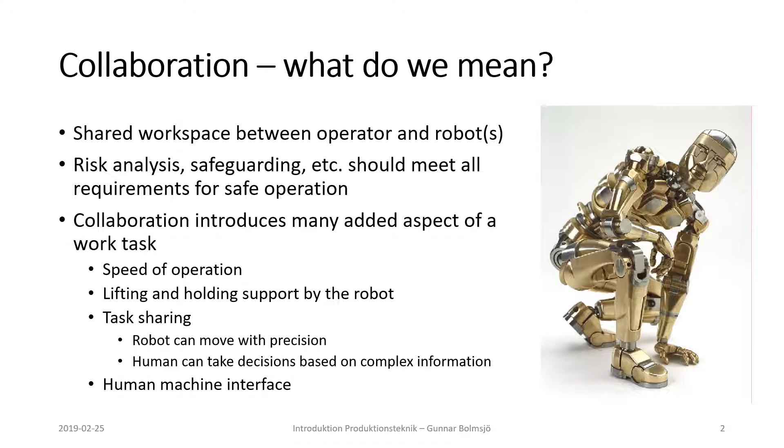So the next few years then, what are we going to see? We are in what we call an Industry 4.0 next industrial revolution. Maybe revolution is not the right term here, but something is happening. It's a paradigm shift anyway,

that we're moving into a situation which allows for more artificial intelligence, more autonomous operation, autonomous work tasks done completely by algorithms, controlled by algorithms in another way than was possible before.

What we have seen so far is that machines, robots, whatever it is, processes, they have been controlled by pretty deterministic programs, so that in every state, in most cases, it has been possible to know pretty well how a process is going to happen.

What is the robot going to do, what is the machine going to do, and so forth, with a few exceptions when we have sensor-based control. But anyway, that has been the norm. But that is going to change now. And we are moving also into this kind of thing, which is collaborative applications.

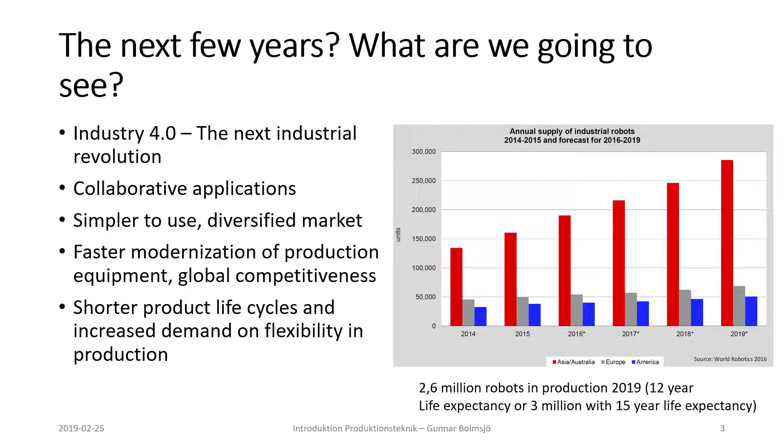The operator and robot collaboration in production systems. So we talk about this co-work, and when we do that, we have to look at safety, of course. That is crucial, and the machine-human interface, and that has to be an effective and intuitive sharing of work tasks.

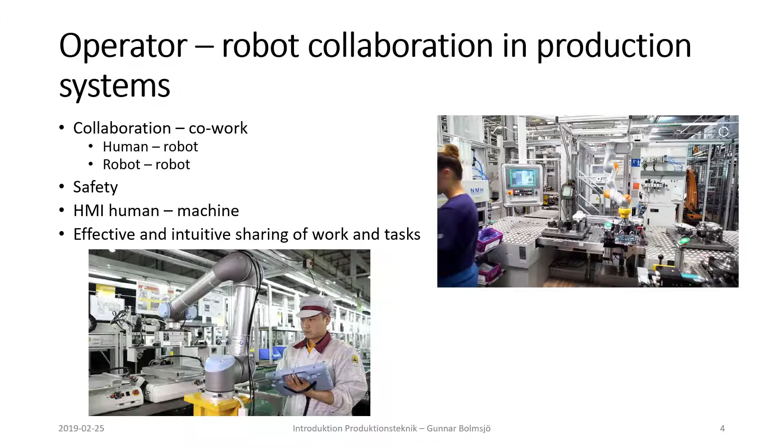And this case here is just a use case to illustrate what we talk about. So the human is actually combining the precision and holding capacity of the robot by getting and placing small components where they should be, which otherwise would be quite complex and complicated for a robot. And the mobility of the human is just outperforming any type of robot in this type of application. So this is quite a good example of how it could be with this kind of combined collaboration.

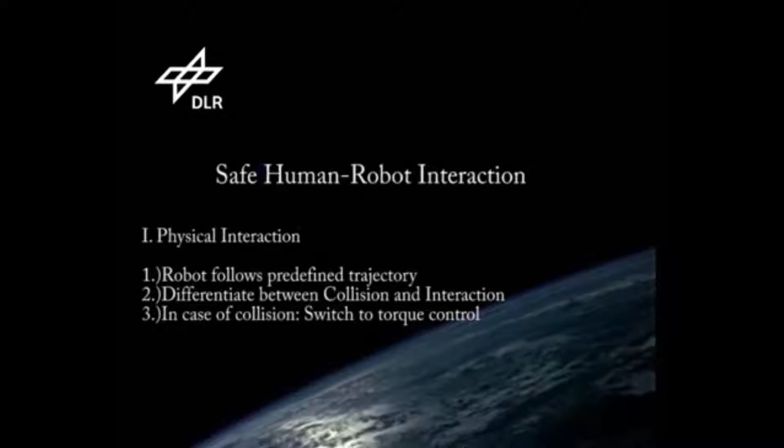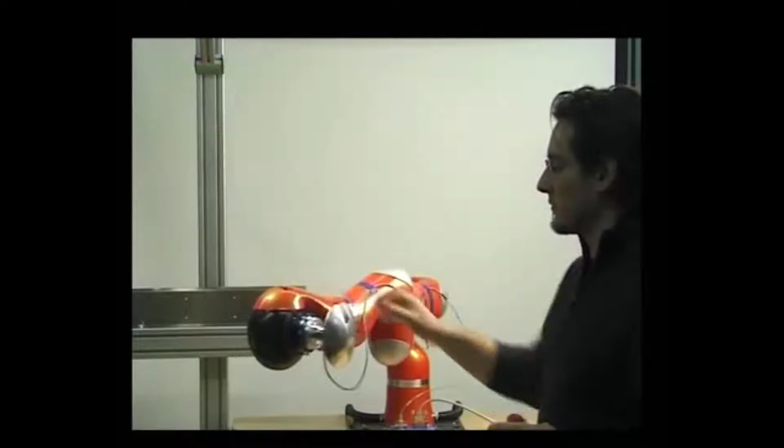But we come back to the issue of safety and some examples about how that could look from the perspective of what is possible when we talk about force torque control, safe control, and there are opportunities in autonomous mode control, so to say. So these movies are made by DLR in Germany, in Munich. They have a really good mechatronics group related to these kind of issues, and force torque control of a KUKA LWR robot arm.

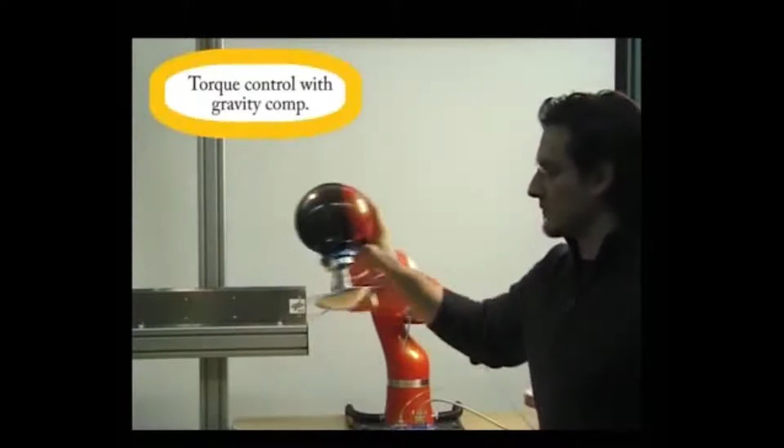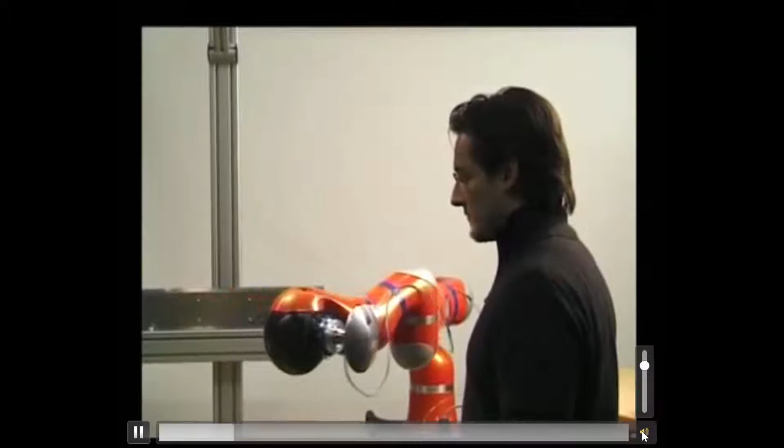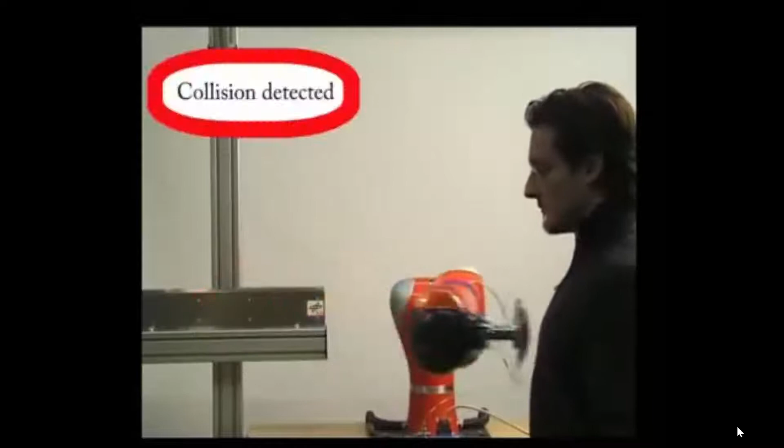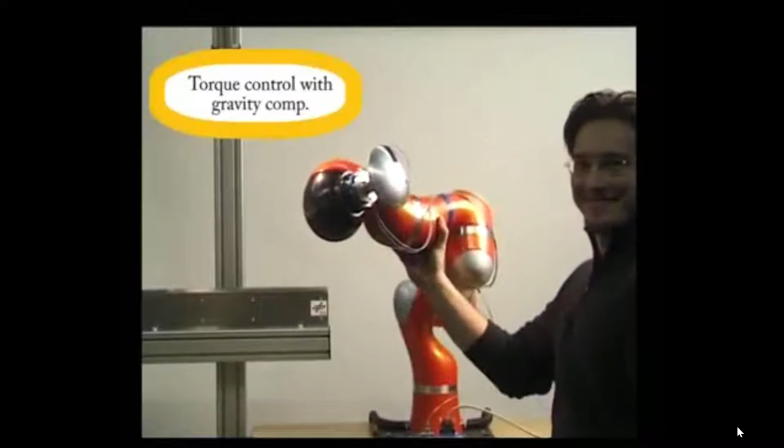And this relates to some experiments related to human impact experiments, as you see here. And the controller detects the collision, and it has to have a gravity compensation because the measurement of the force is related to the impact of the body. But at the same time, it has this kind of gravity that it has to compensate for, so it knows what is the impact, what is the gravity, and so forth.

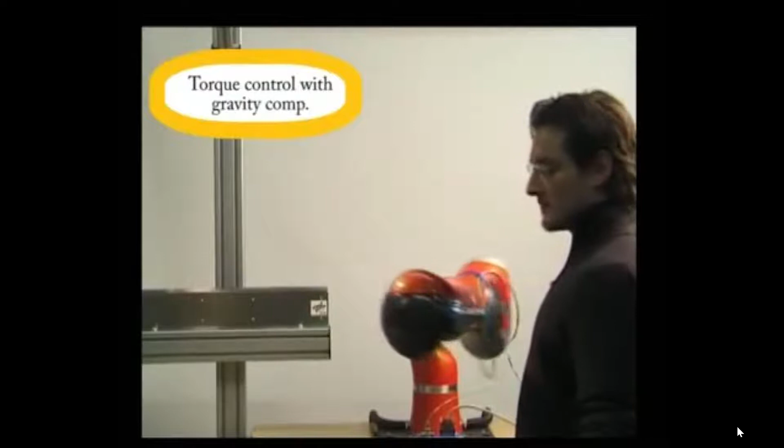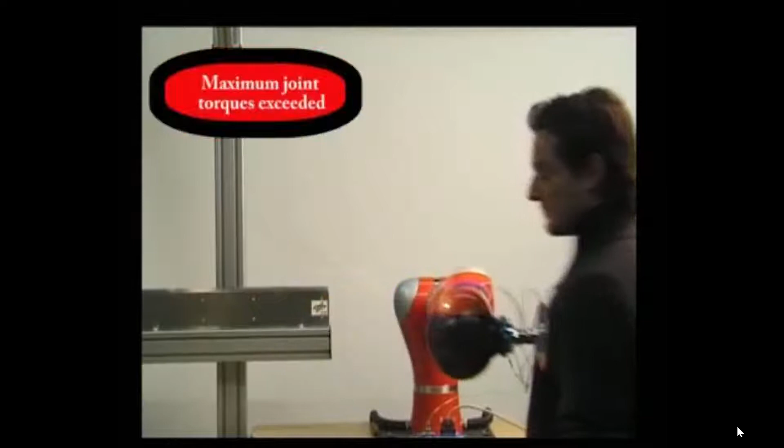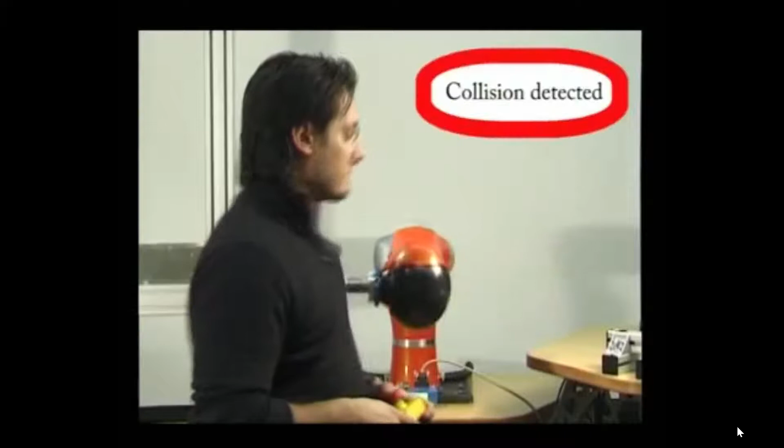And there are some limitations. How fast can you go without hitting too hard, so to say? That was in this case the maximum joint torque exceeding. And what is allowable or acceptable, this kind of experiment in reality should be much lower than this, of course. And especially if you have something sharp in the tool, of course, that is super risky in this case. So that is nothing we can have.

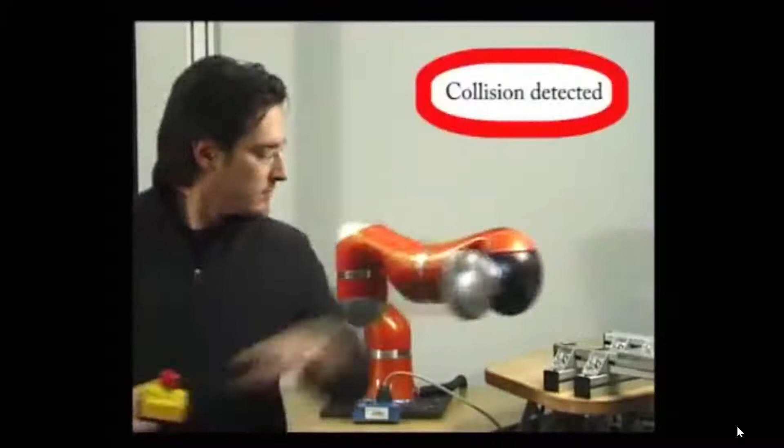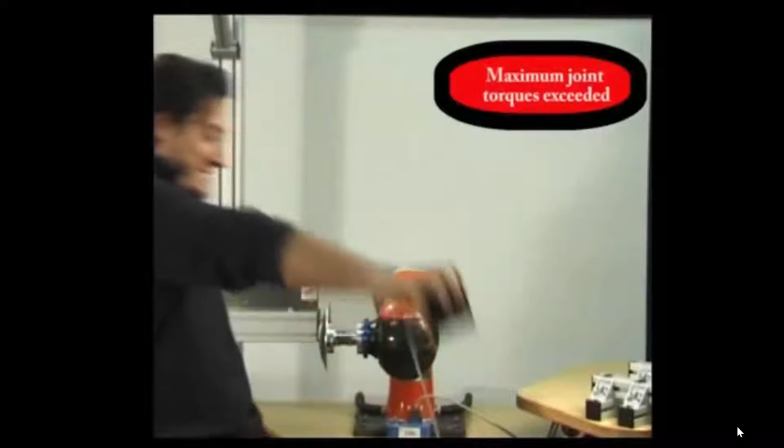This is another experiment on the shoulder. And this is the highest velocity that this robot can actually go with, 2.5 meters per second, which is pretty high. And that is nothing that could ever be accepted. But for demonstration purpose and for research purpose, it illustrates how things can look.

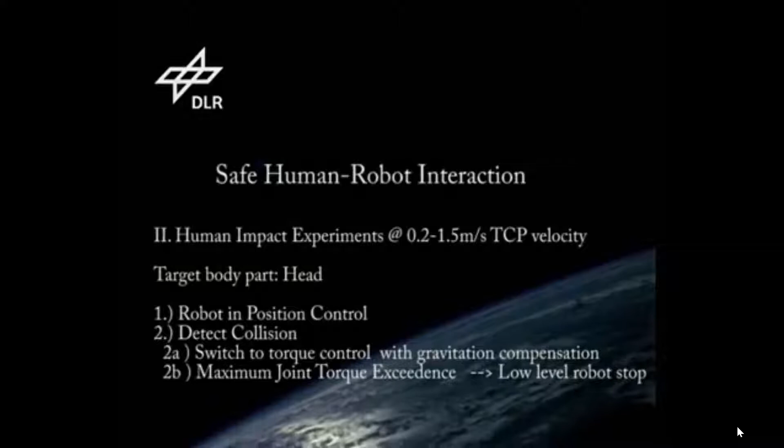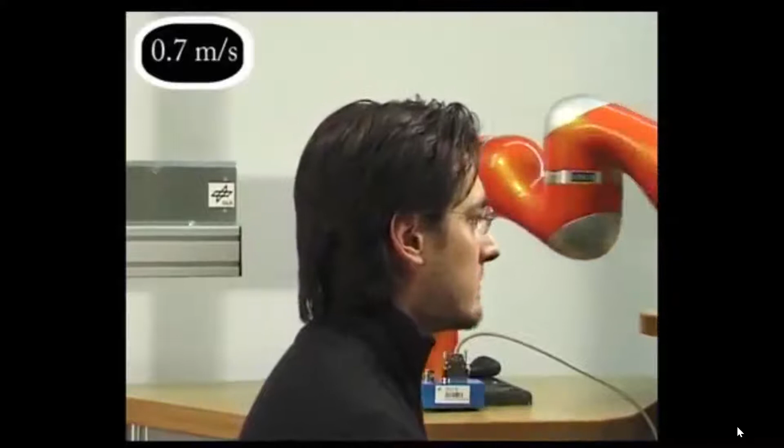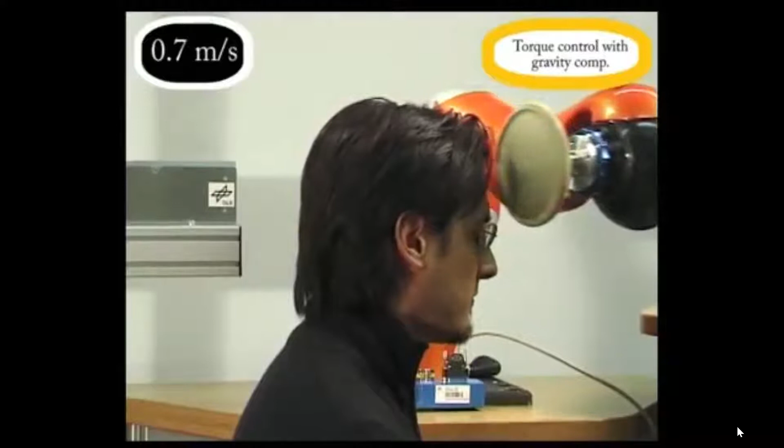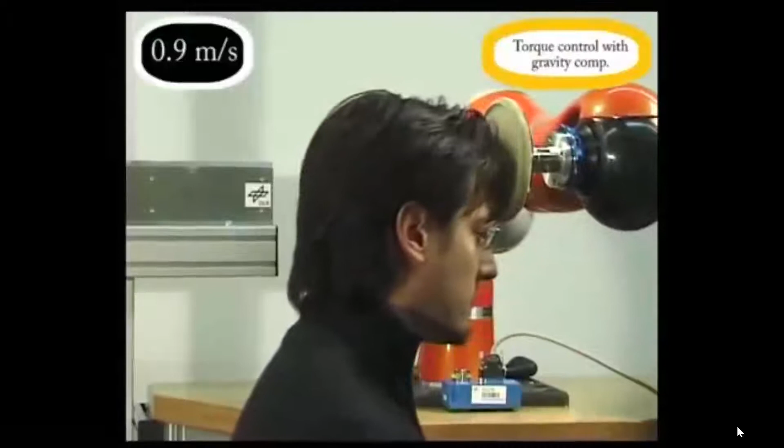But if you do the same type of thing with an industrial robot not intended for this kind of collaborative application, that would be like a killer, especially this kind of demonstration with collision to the head. Most robots really don't stop. This robot has a control system that has that kind of capability to detect and react fast. And that is nothing that anyone should do at home, really, or in the lab. For what reason? Because this is really dangerous or even fatal in most cases.

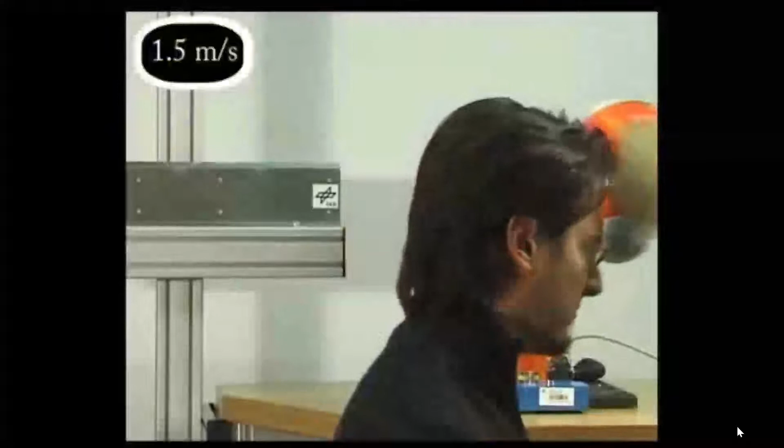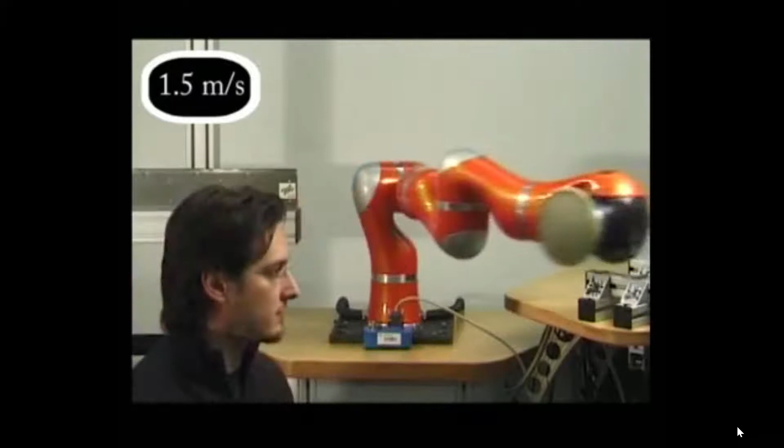Because moving with this kind of speed, in this case 1.5 meters per second, is really fast and really dangerous. You can also see that he has his glasses on. And I asked him, and he said that he really forgot. It could really have destroyed his eyes. So this is nothing one should do. But this shows anyway some quite interesting research in the area of collaboration, and that can be taken further.

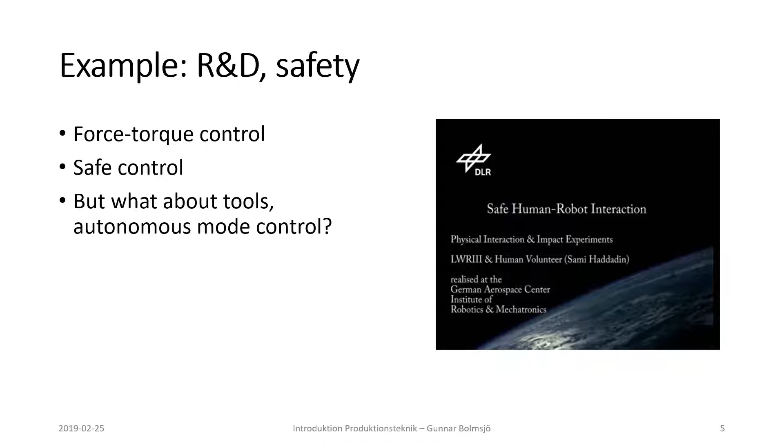This guy, Haddadin, is currently working with the Franka robot that I will show later on. Some other examples related to research and development and related to skills are work related to virtual reality, augmented reality, sensors, deep learning, and artificial intelligence.

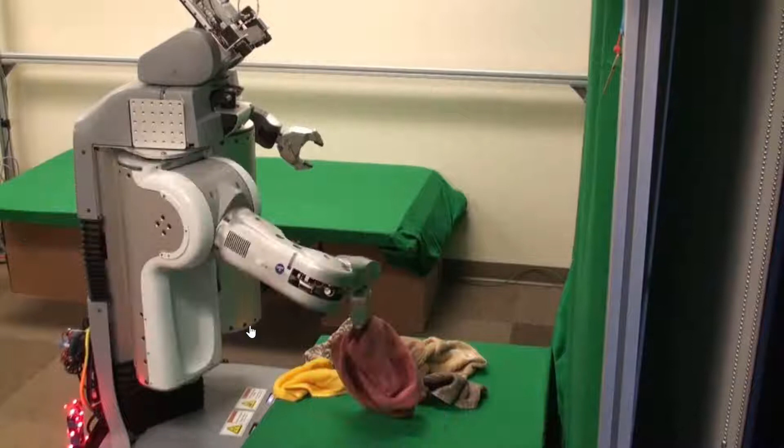And if we look at it in more detail, one can look at some applications or some work that we feel is really simple. And some people ask, is it possible to do it by robots? Like this, with cloth grasp point detection. So yes, it is possible. And in this case, it's the robot PR2, costing something around 250,000 euros.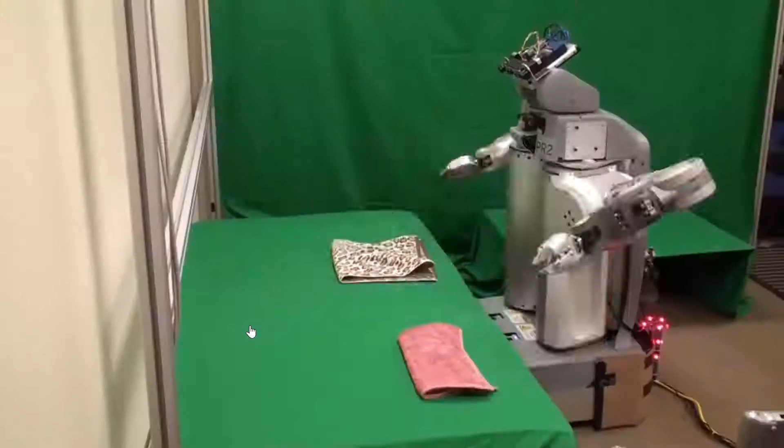It can do this. Now one has to accept that the speed of operation in the movie clip is much faster than the real application performed by the robot. But it does it, really. It uses stereo vision and scanning capabilities and so forth to identify what it is grasping, and then it can perform the task. So things can be done which normally are done by humans, but on the other hand, usually these kinds of tasks can be performed by humans much better and faster, of course. It can continue like this.

And the other one is pretty interesting because that is how to make coffee using a coffee machine. And actually, what is done here is that the operations by the robot are done and programmed, so to say, on the fly, using the information on how the machine actually works and models, even also 3D models, of how it is or should be operated by the robot. And well, let's have a look at it.

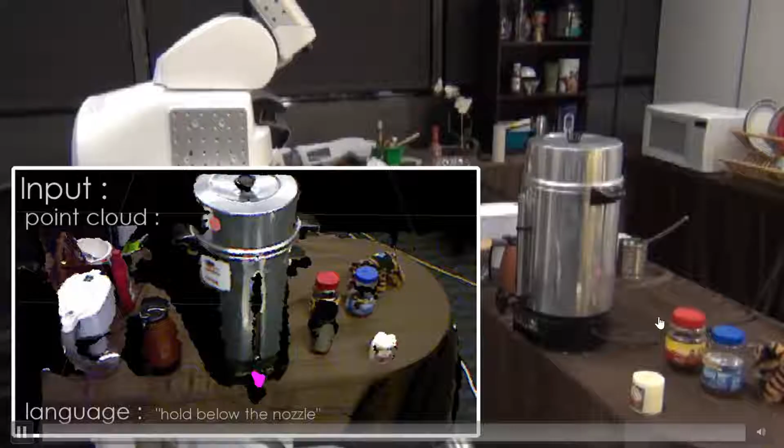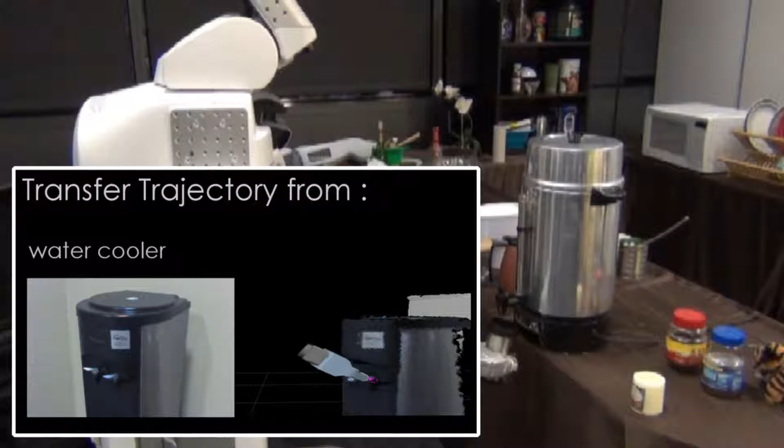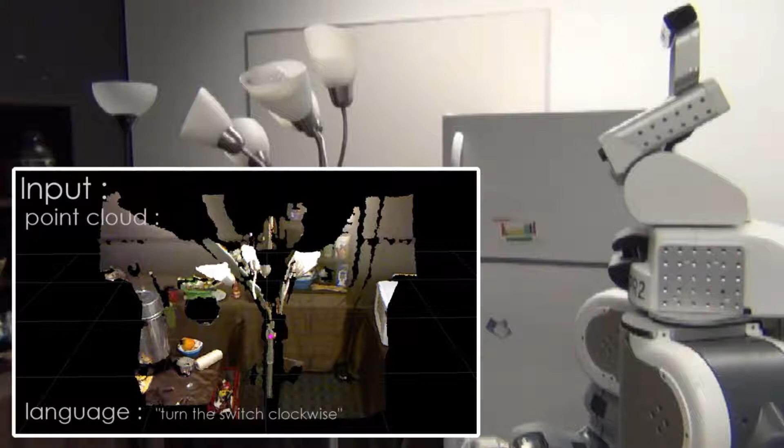And it has sensors, so it can combine, so to say, the model-based information with the real information. So it's a sort of augmented reality, reactive programming, and the verification is done on the fly when it is working. So there are different types of applications here.

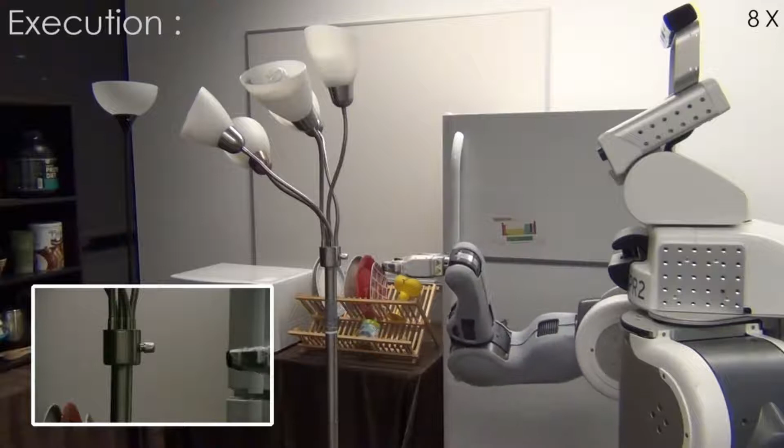Now it is instructed how to turn on the knob for the lighting. It gets the verification when it does so, but it has a model of what to do, so to say, and this way the robot can learn different things on the way, which it has in a model, and that is actually what Industry 4.0 is about. But this introduced virtual reality, augmented reality, and in real life feedback to the model and vice versa. So it's pretty interesting.

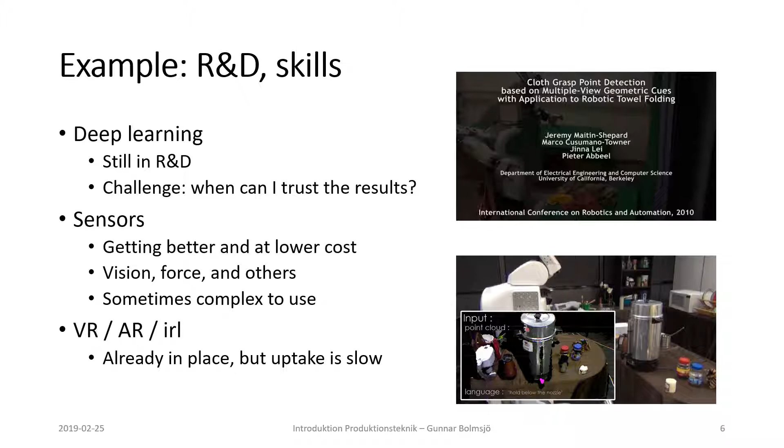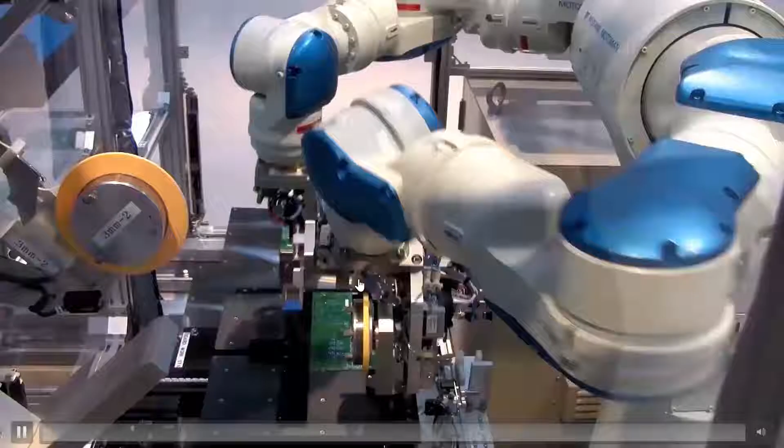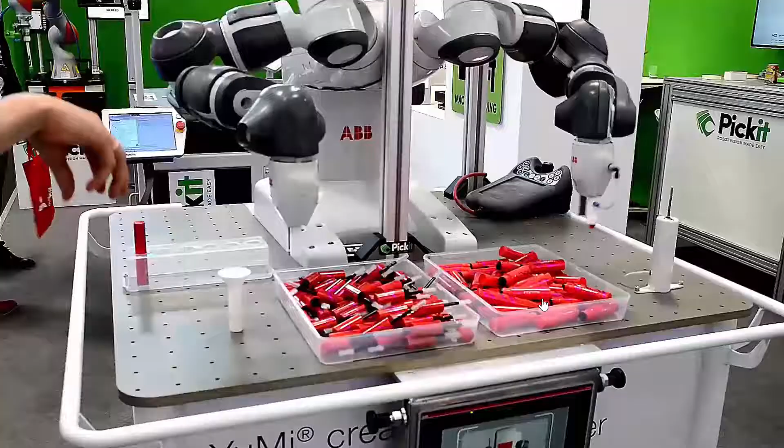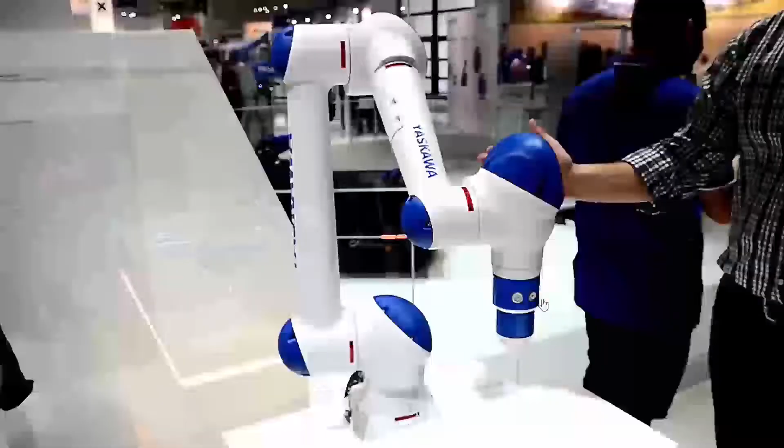So what's next then? This video shows some aspects of what's ongoing at the moment and what to expect. Two-armed robots have been ongoing for some years. It hasn't taken off as expected, and in reality, a two-armed robot in one unit is a bit more expensive than two single-armed robots combined, which also could be formed in one controller. But still, in some cases, it creates some opportunities to use it like this.

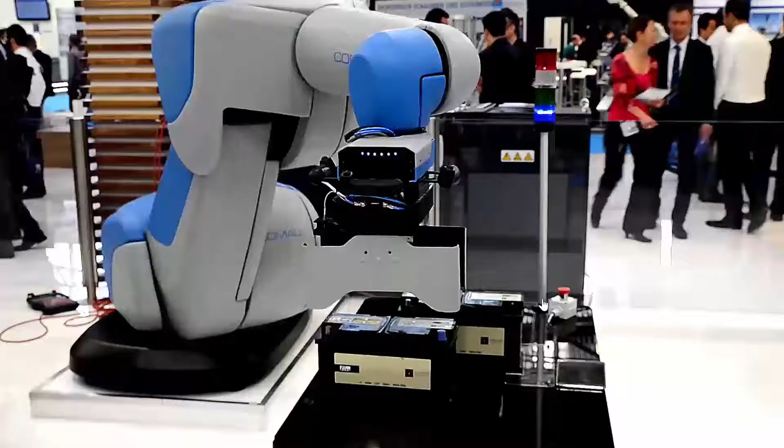And the collaborative applications are supported by new developments of robots that have inbuilt force sensors for detection of proximity of people or collisions. This is another example. The former one was Yaskawa, and the one before was from ABB Robotics. So this is Comau, an Italian robot company. So there are many developments relating to these kinds of things, actually.

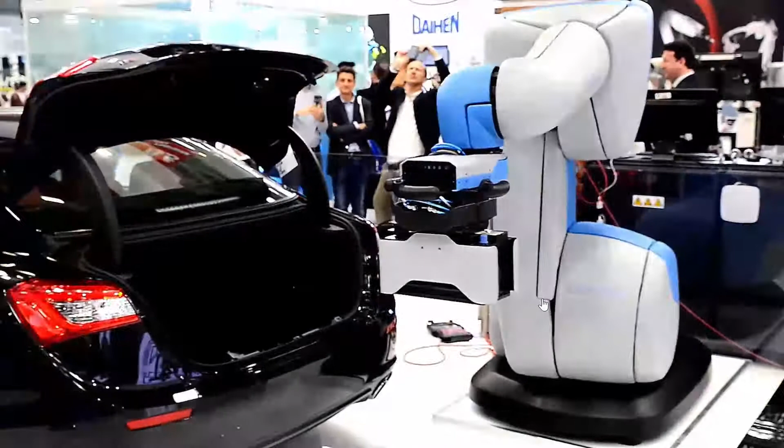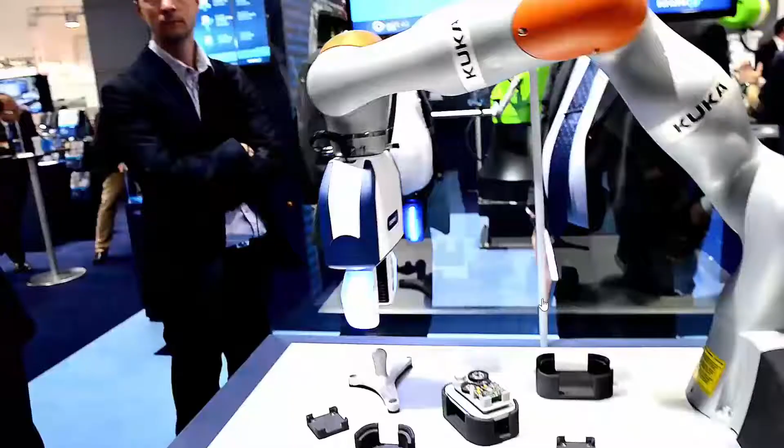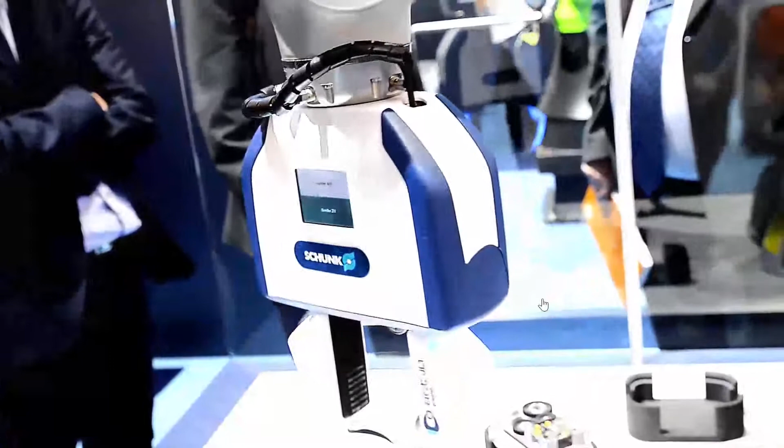In this case, it's the assembly or installation of a battery into a car, and it's supposed to be on the production line, where people are moving around. Now there are some implications related to this, and that is the speed of operation is usually much slower than otherwise. These kinds of robots don't operate at 2 meters per second; they operate much slower. And in this case, the robot gripper was integrated with a sensor to detect the presence of a human.

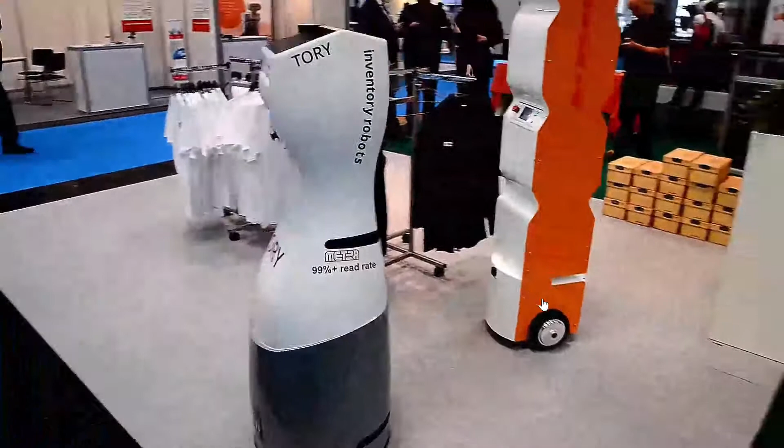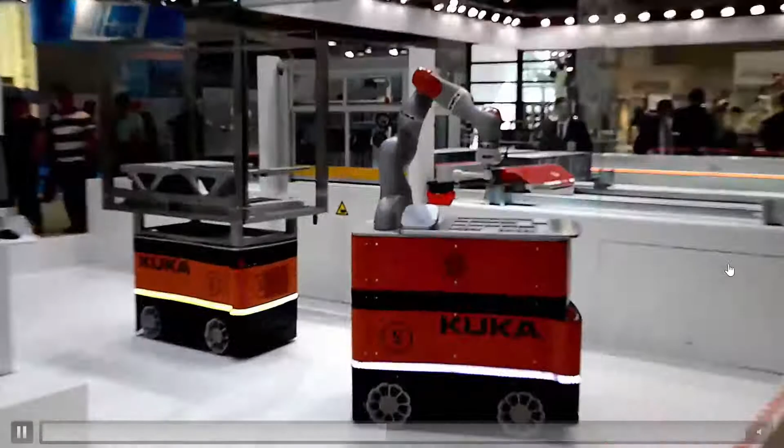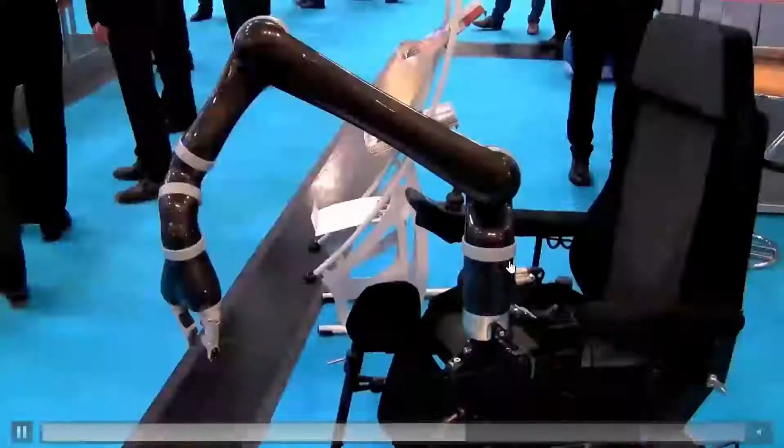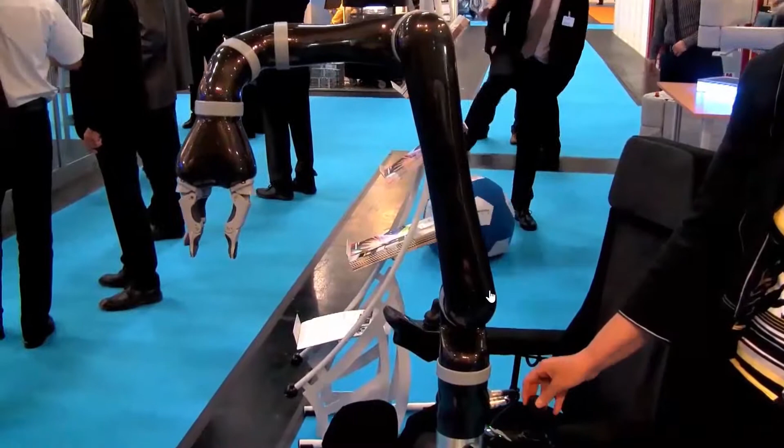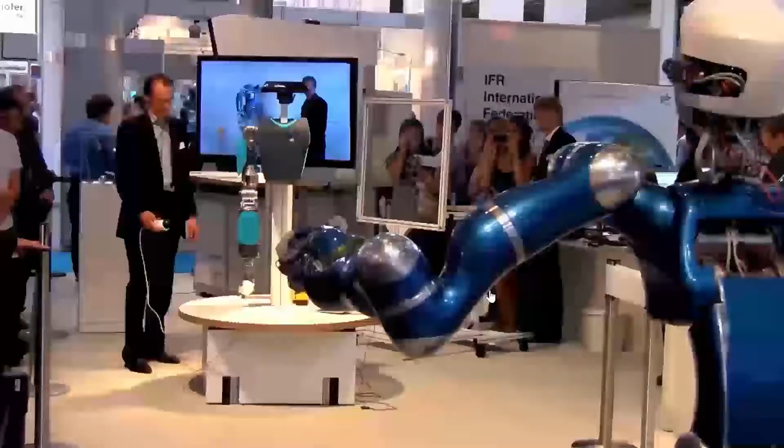This is a lightweight robot to be used on an electrical wheelchair for disabled people, to pick and place things or as an eating aid or whatever. This is a gripper like a hand, but the use of that one from Schunk is only in academics so far.

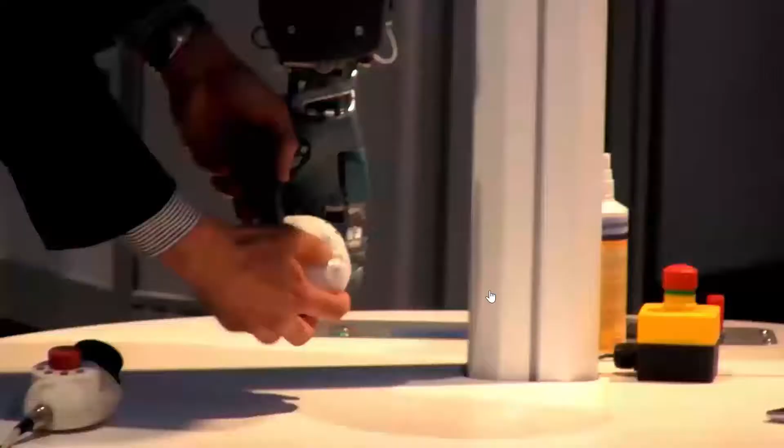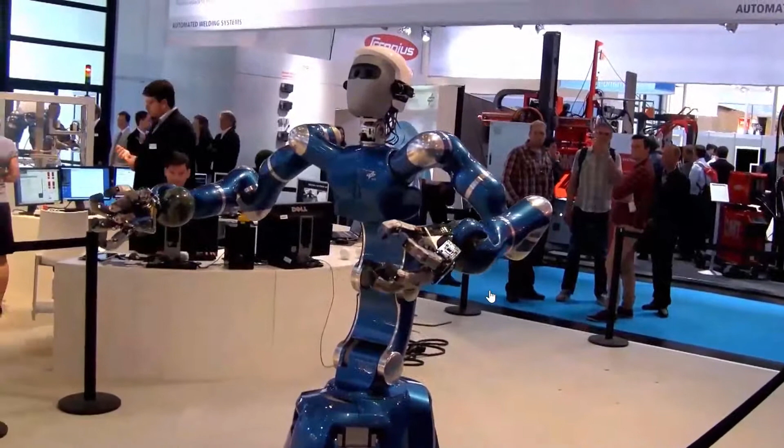This is kind of a demonstration of the capability of reacting to, in this case, a ball coming in, and in reality, it's pretty simple because with that kind of data and the knowledge of what it is about, it just calculates the path from pure physics, so to say, and it works all the time if it's fast enough, and it really is. So this is just a research platform for different kinds of studies related to control.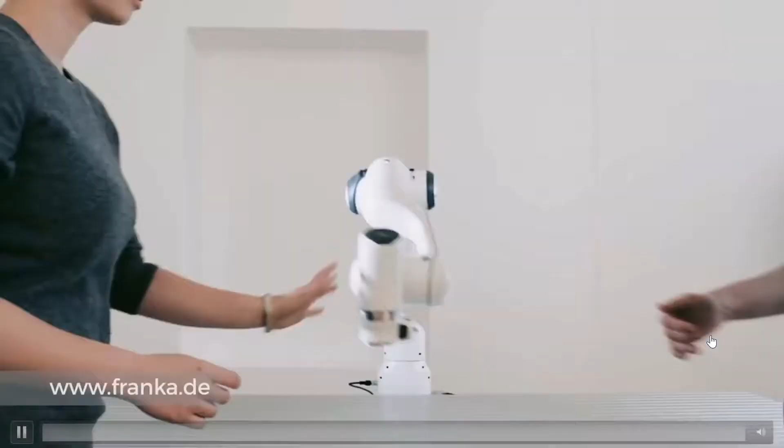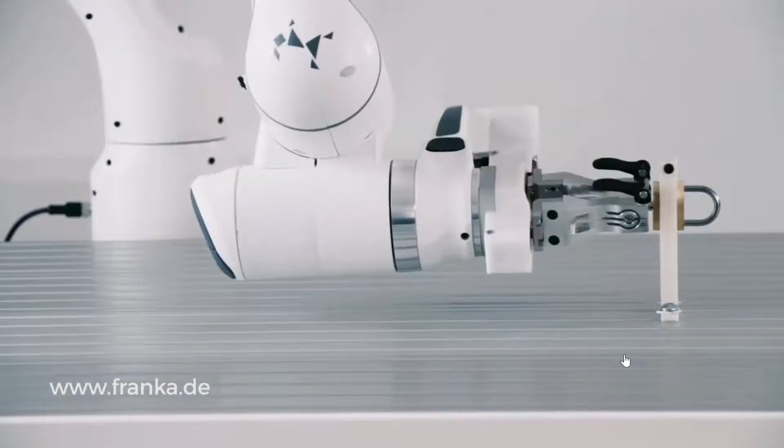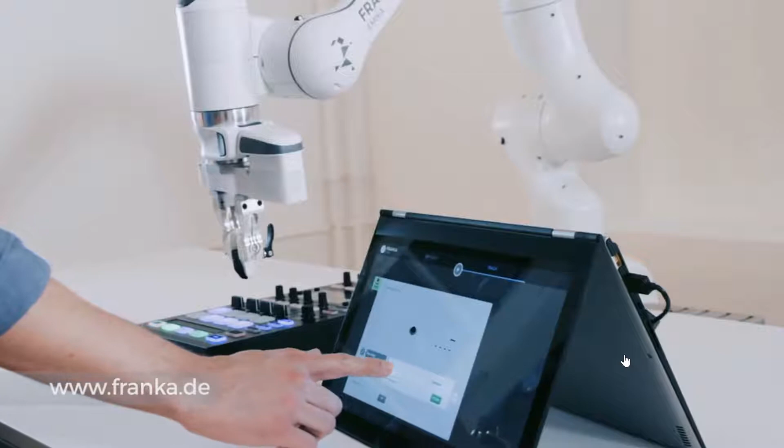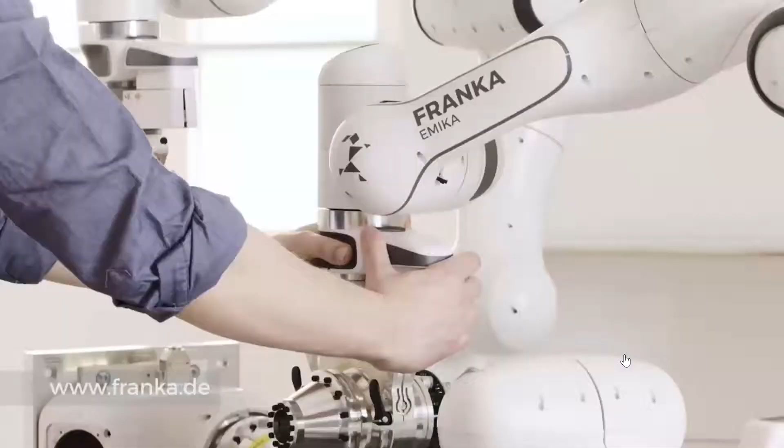I mentioned that Franka robot, and that's an interesting development, actually based on the research done in safety before. I showed the video before. And it has a controller that can react quite rapidly on detecting collisions. It has sensors in all the joints, so it can detect what is happening and react to it. And an intuitive user interface for programming and doing things. And the 7-axis operation, so it's pretty versatile in its motion.

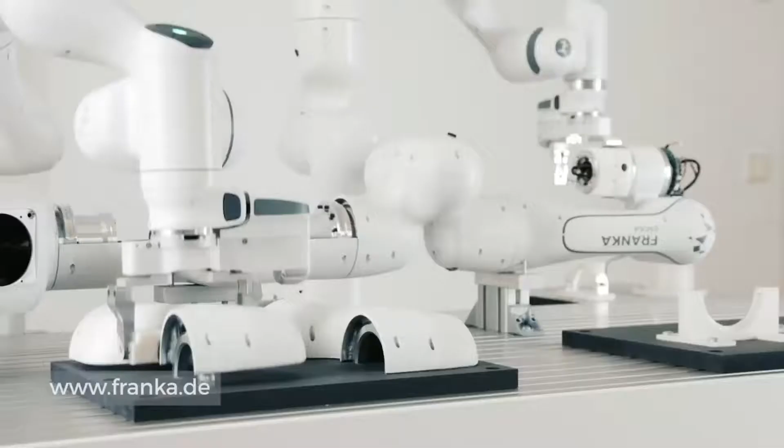Yeah, this is just an example of how the robot is building itself, so to say, more for fun, I think. But anyway, it shows what is possible.

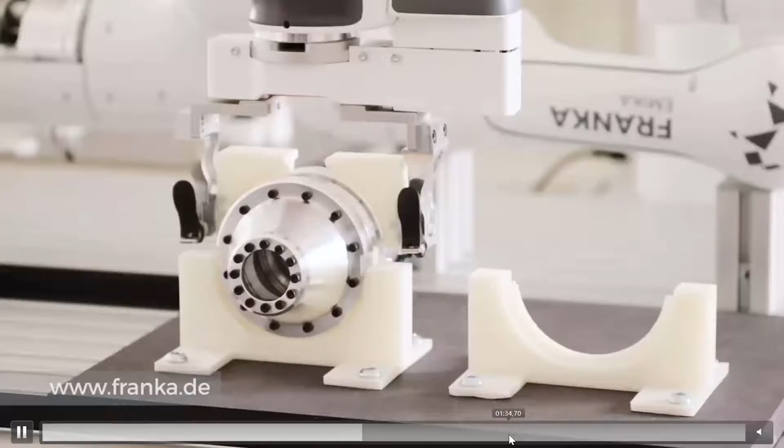Move forward. So, just some discussions based on this. Lots of things are coming up now: sensors, new robot types, software development integration, skills and artificial intelligence, augmented reality and virtual reality, and more. These things are happening at the moment.

Sensors, which is interesting in this, is that there are lots of products out there that require sensors. Take, for example, cars, which are supposed to drive by themselves. So a lot of sensors are in development as we speak, and those sensors could easily be implemented in robotics as well, or machine lines, or wherever it is, and at low cost, because when they are developed and built in millions, they become cheap. And this is a new thing compared to how it has been before.

New robot types, definitely, but most robot types have been developed and made as they are now, but there will be new variants, more specific for specific applications, of course. Some variants that are more adapted for its use. It's a way to actually adapt to the customer needs.

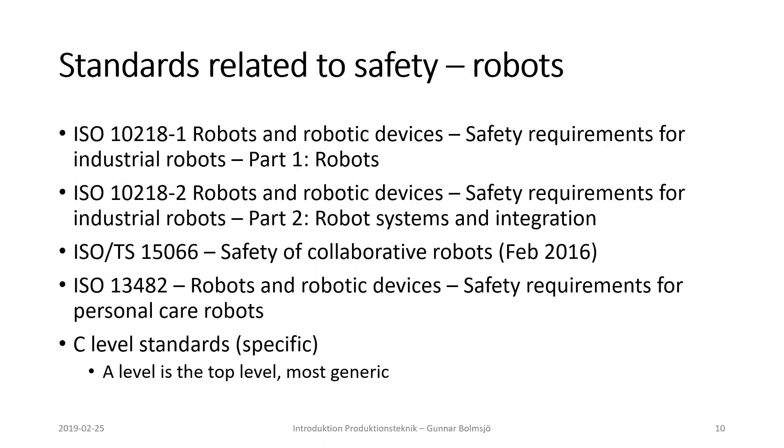And then we have 13482, which is robots and robotic devices, which is related to safety requirements for personal care robots. They are not the same as industrial robots, but they are harmonized together in a way. And what we can see in the future is that it is blurred in a way, because if you use a robot used for services and you apply it in industry, it will become by definition an industrial robot, and vice versa. So in a way, it's going in both ways.

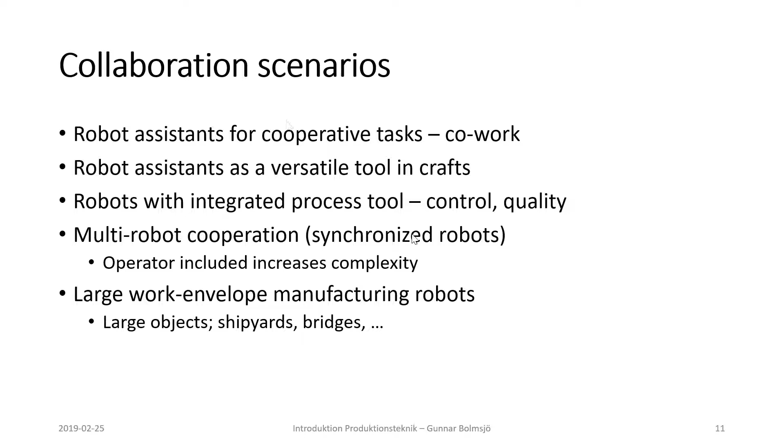Anyway, there are some collaborative scenarios: robot assistants for cooperative tasks, co-work. It could be robot assistants as a versatile tool in crafts. It could be robots with integrated process tools. It could be multi-robot cooperation as synchronized. It could be large work envelope manufacturing robots, large objects, shipyards, bridges, and so on. So the variation here is huge, really, how it could look like.

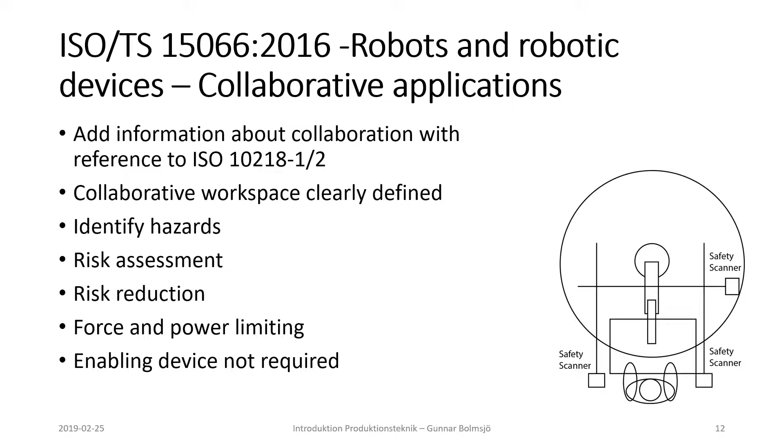There are some challenges still, and that is if we use the thinking behind collaborative applications in the way it is intended, in flexible production, where we change things frequently, and we might even reconfigure the system. It might be the case that there has to be a new risk assessment, a new risk analysis, a new risk reduction related to this. And if this is the case, the CE marking might not be valid anymore.

And in those cases, as pointed out in the standard, it says that in consultation with the user, the integrator, meaning the company, the system integrator that actually made the system from the beginning and also made the CE marking, shall identify and document the task associated with the robot cell, and then possibly assign a new CE marking. So this, of course, is a challenge and not really feasible in flexible production.

Because if we talk about low volume production, we might want to change it every week, every day, whenever we like. And we cannot just call the system integrator to do these kind of things. We have to do it ourselves. And if that knowledge is in place, we can do it. There should be no problem with that. And this means frequent changeover between products. Could be every day, every fourth hour, whatever it takes.

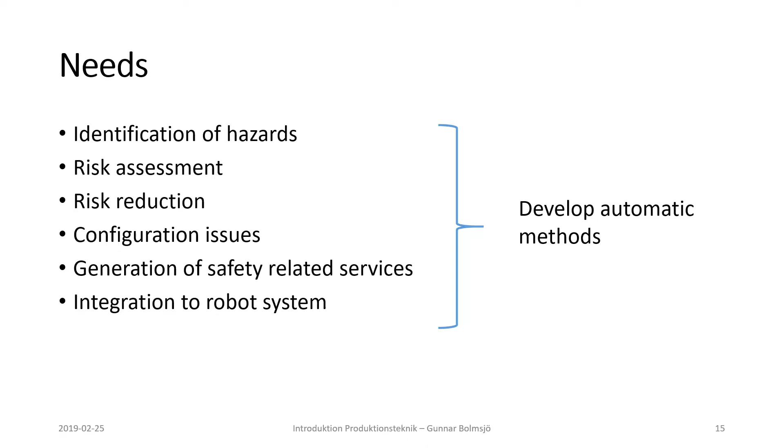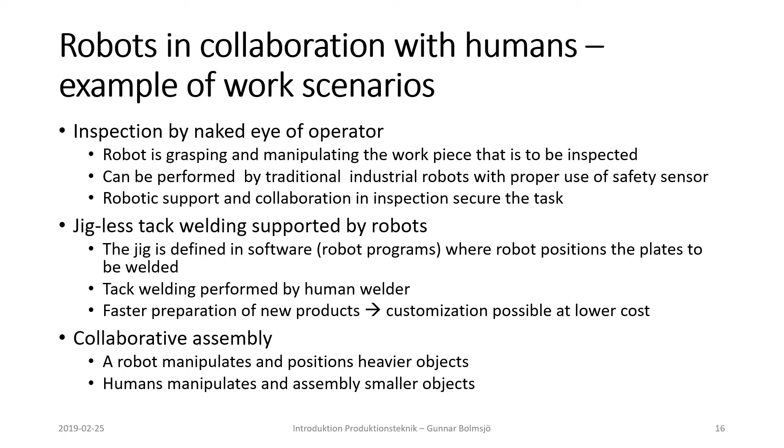So discussion based on this is actually related to the challenges, related to safety, related to the standards. How does it look? And the standards are under revision now, and that also relates to the machine directive that defines how systems should be designed and implemented, at least within the European Union, to be safe. And other stuff, of course, related to efficiency and opportunities in new directions. That is something we have to see in the future.